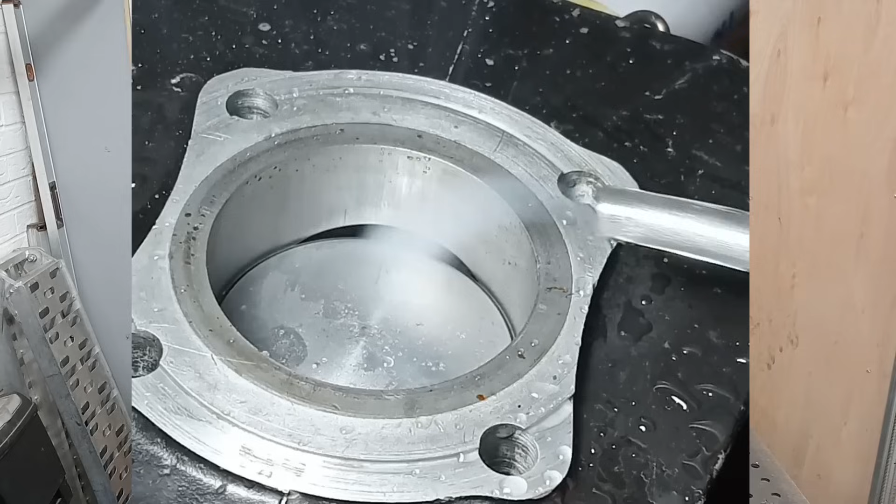I'm Dave, and today we're going to be trying to increase power by doing some flow testing on the exhaust duct of my Kawasaki AR93. We're going to do some modifications with modelling clay, and see if we can increase the flow, which we'll measure using the TalkSoft software.

Why am I doing this? Well, most of you are probably aware of a guy called Thiel. In his book, The Two-Stroke Master, which I've been reading, there's a bit worth noting: he asked for a flow meter to check the effectiveness of changes to the cylinder ports. Thiel used flow meters - mine's a slightly different setup, but it's measuring airflow. I believe it's something that could help us develop more power.

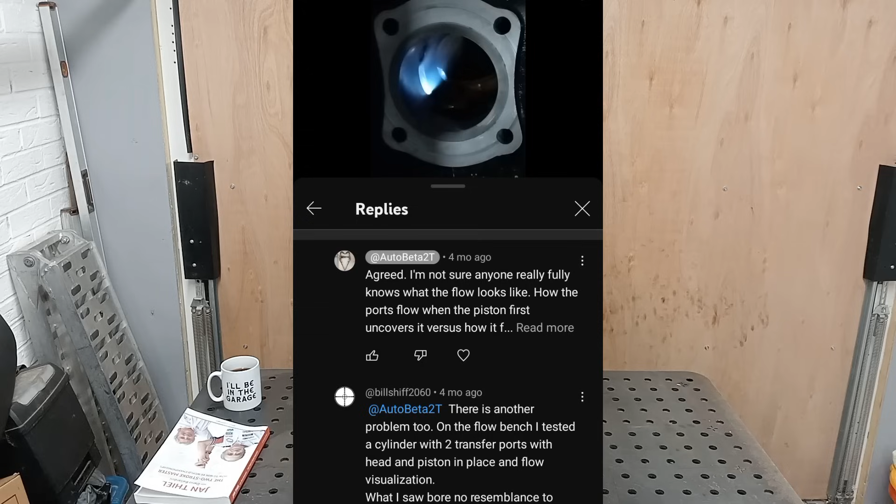Along with seeing that in Thiel's book, I've also had some conversations with a guy called Bill Shiff about some flow visualization I put up. That conversation sowed the seed, as well as looking for a way to flow test a two-stroke engine. Other resources too - there's a British guy who lives in America called David Vizard. He's got a lot of videos on his YouTube channel, particularly on flow testing.

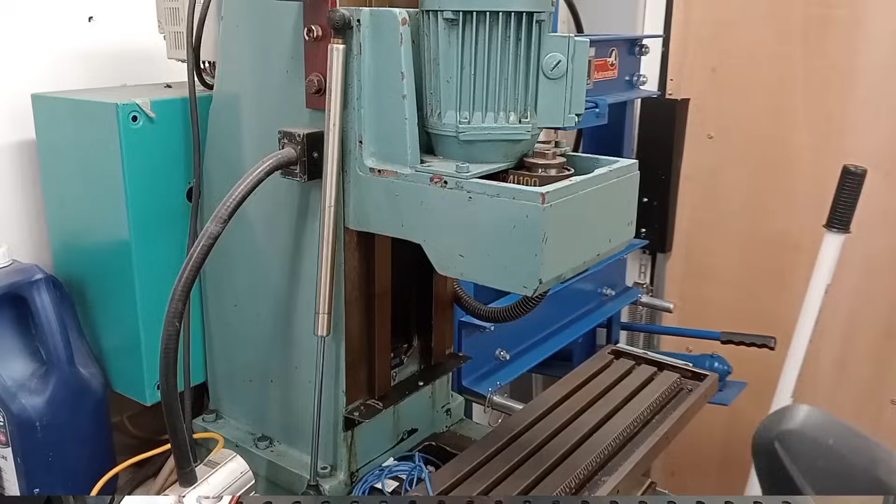I intend to do the exhaust today. Transfers will be a later video, and following on from that, I want to physically modify the cylinder so I can try some inserts, measure flow from 3D printed inserts, and then use my CNC machine, which I need to get going, to make a CNC insert for the exhaust duct that I've tested in 3D printed form, and see how that actually works on the dyno.

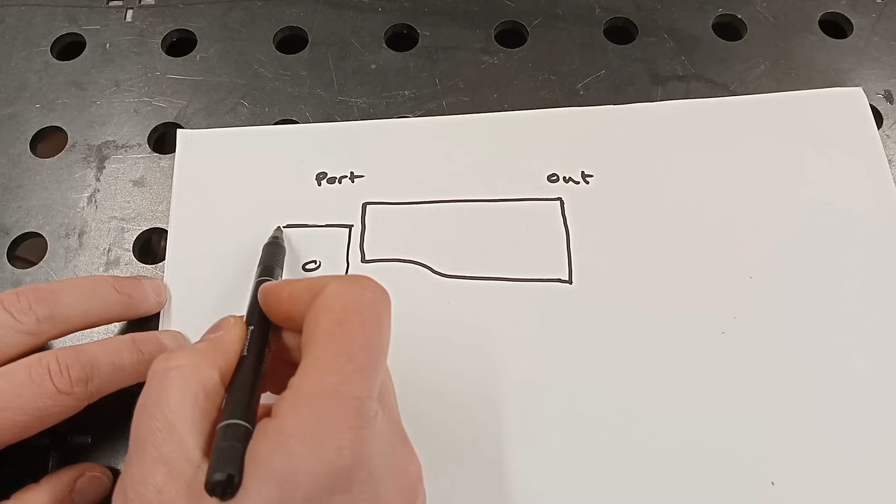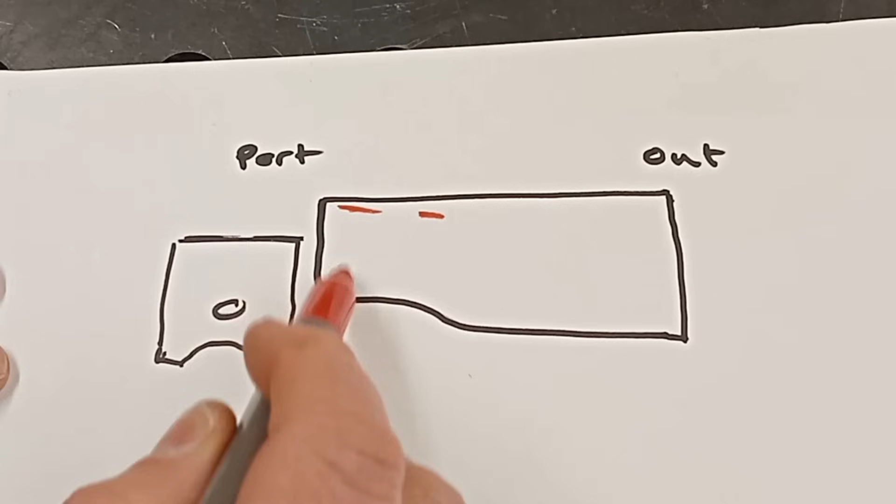Just wanted a quick look at the exhaust duct port. So you've obviously got a piston that can be all the way, closing the port totally, and at any position in between - I'll just notionally put a piston in there. As you can see, this duct has to cater for lots of different positions. It's got flow going into it initially through only a small area, and this flow's coming in and it's got a big void here, and then as it gets further down to the bottom, I imagine it's probably more uniform flow.

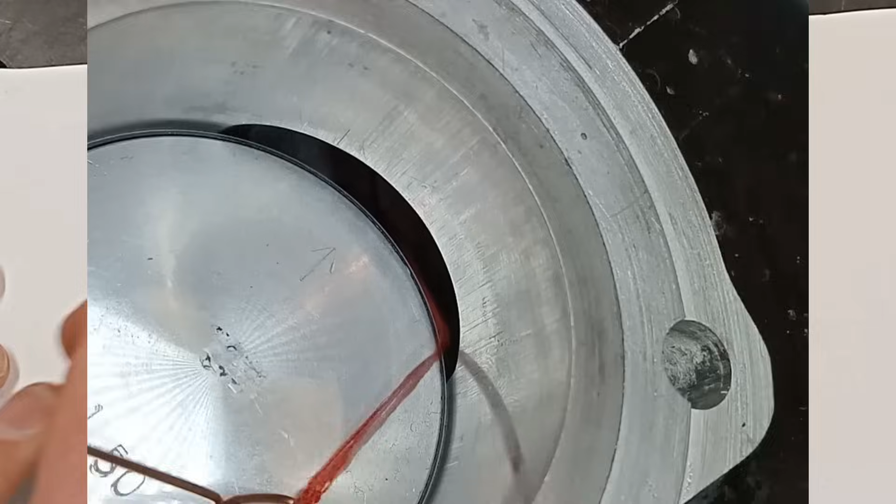For what I'm seeing at these not-fully-open positions, there seems to be quite a lot of slack flow there, and I'm getting a cotton thread attaching to the face of the piston. So really the blowdown is key - if we can optimize the flow at the blowdown to get the most amount of gas out, it should assist us.

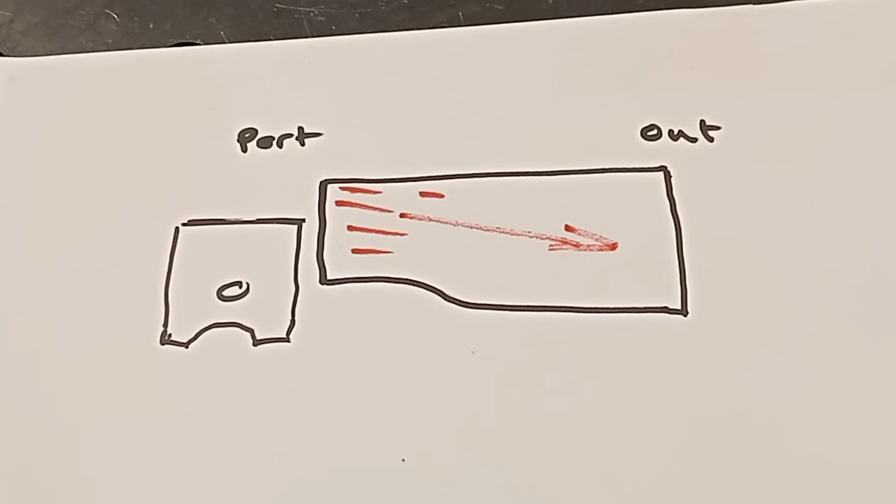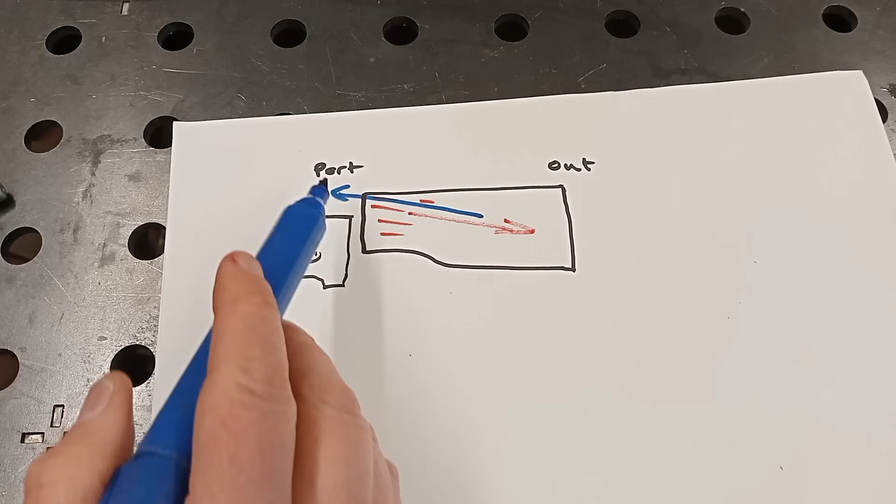Other issues as well - obviously we have all the exhaust gases going out of the duct, but also with a two-stroke, going back the other way, when the stuffing pulse comes in, we've got some fresh charge that we want to go back in. So I'm only doing flow testing going this way, but I've got to bear in mind there's also flow going back in when it gets reversed. So we're kind of optimizing it for flow out - how that's going to affect flow back in, I don't know.

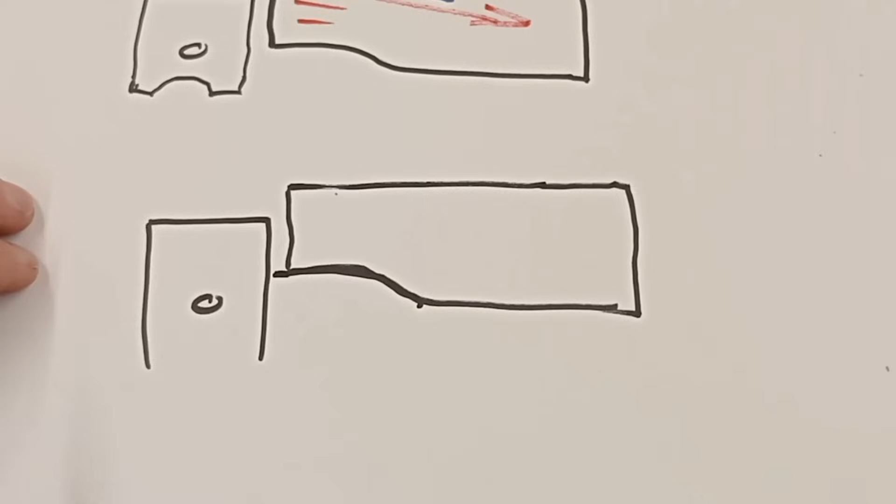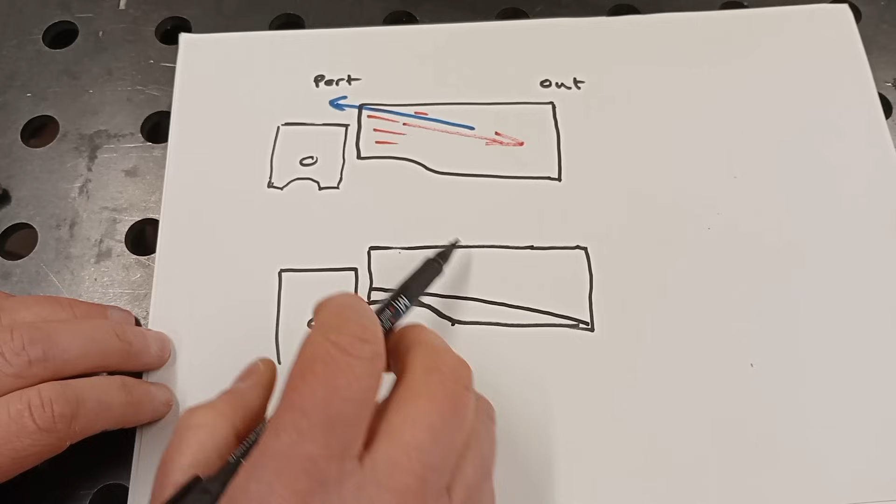So say we want to optimize this duct so it flows a little better - at the blowdown areas, I'd imagine - and there's a lot of talk about filling the port floor. At the minute this piston comes down to here, however there's not a lot of flow going on there. So there's potential for filling this floor, and smoothing it out. It's all about keeping the volume of this duct as small as possible so you don't dissipate energy into it, but also keeping the cross-sectional area.

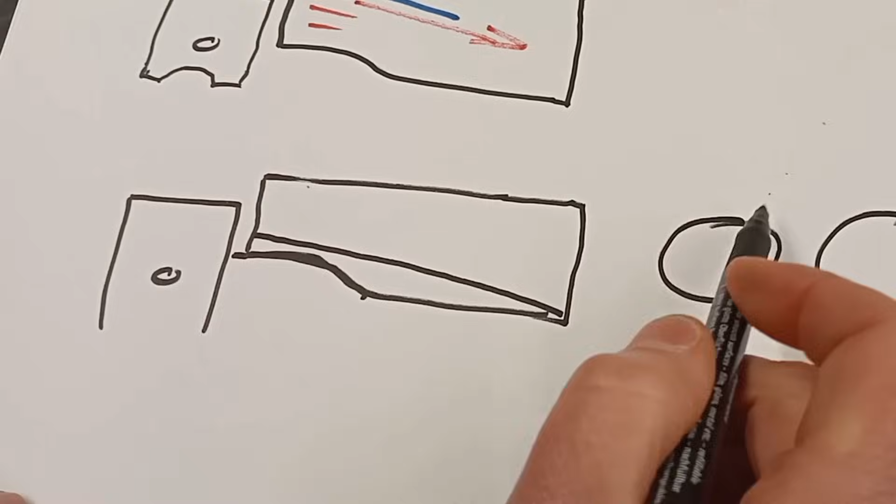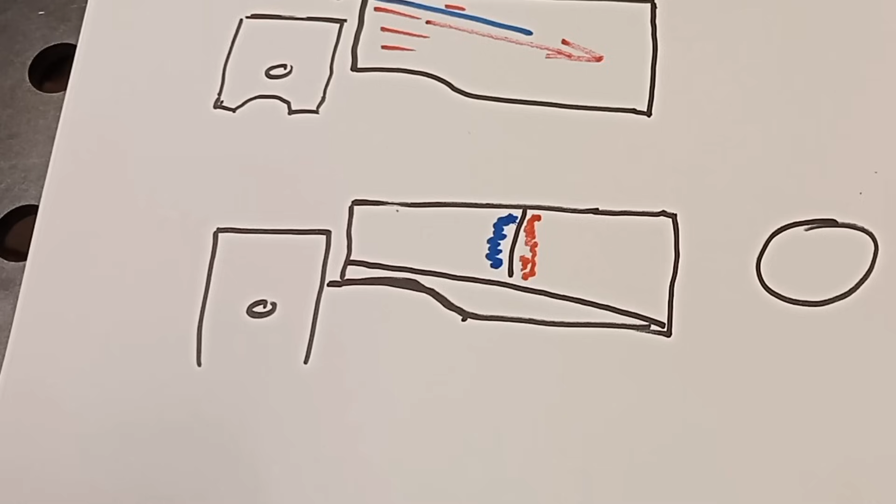If you look at it this way - comparing a small duct versus a big duct - if we put a section here, say you've got all the burnt gases on this side, and then you've got the fresh charge coming out like that, the bigger area you've got, the more this can mix.

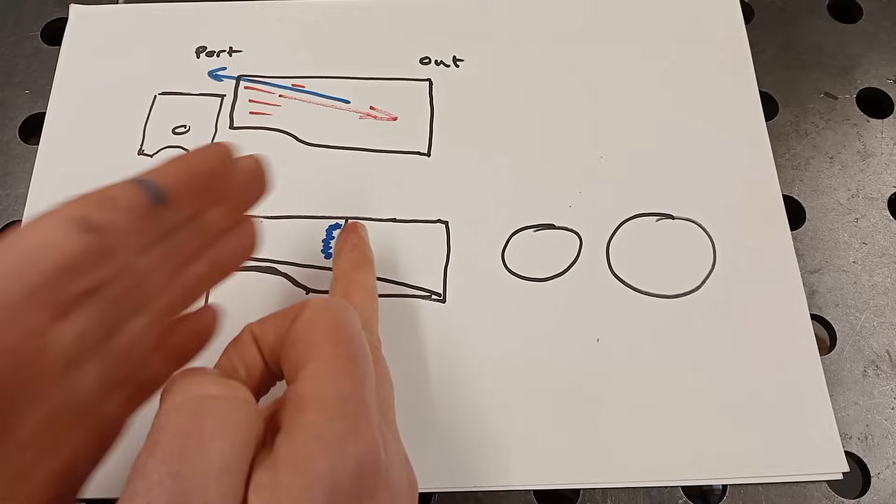And obviously in a perfect world it's not going to be like this, it's going to be chaotic. However, it's all about minimising this area so there's less interface between the burnt exhaust gases and the fresh charge, particularly when it goes back in, because if these are mixing heavily, you're going to get burnt gases back into the cylinder.

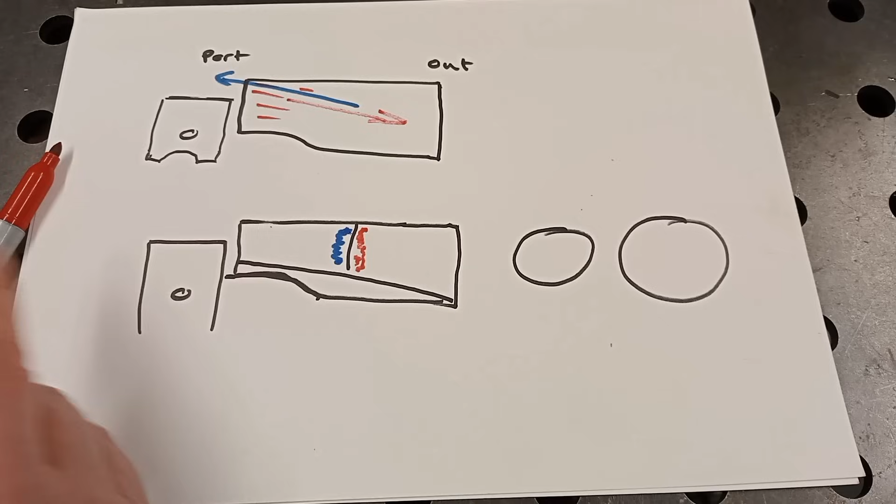So I definitely want to get the flow out, but there's also a certain element of how much fresh gas we get back in, where it's aimed, and probably the tumble and swirl that we put into it, which again helps with the combustion, speeds things up and makes more power on the next stroke.

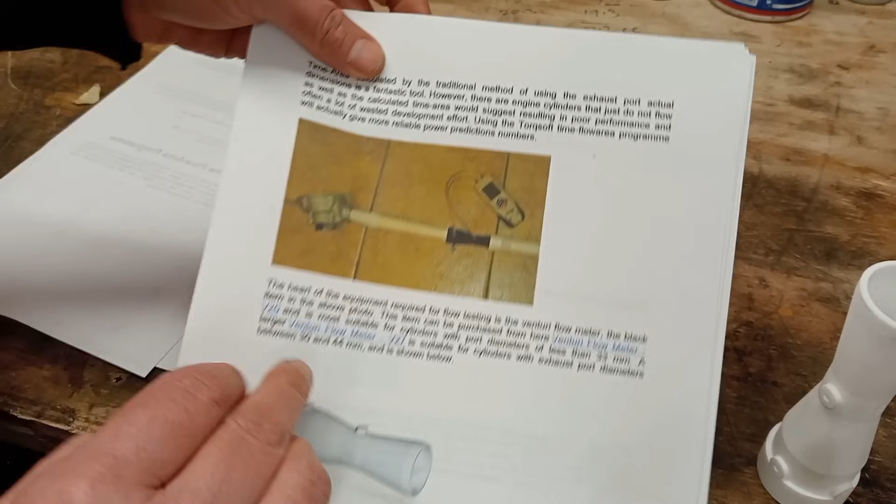I bought this flow venturi, so that gets connected to the pipe. You can just see it here. These are the instructions. So the pipe comes out, 300mm pipe into this venturi.

Got some brass nipples that I'm going to put in, and they sit in there in these 3 ports. I've got to ensure that I don't bottom them out on that hole either.

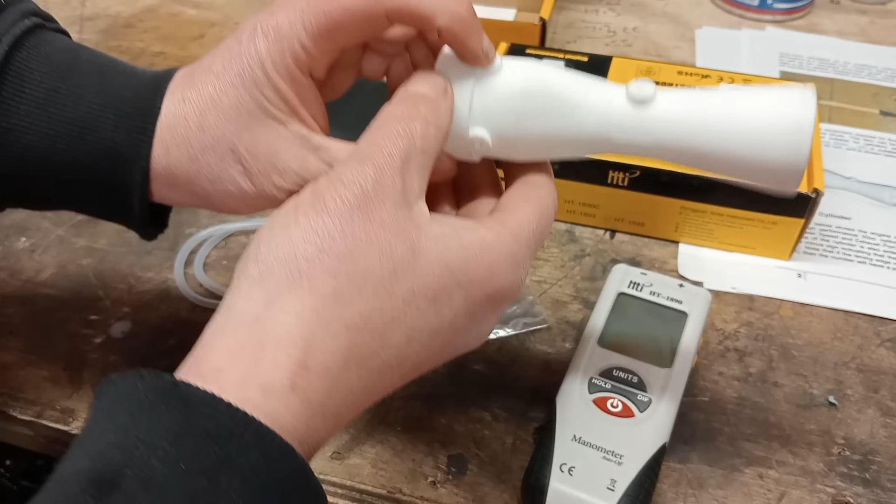I'm going to test the pressure with these manometers. You can see I've just got the same one. You're measuring the pressure, so you've got a reference pressure. I've got 2 of these, so one can sit there as reference pressure, and the other one's going to measure the delta.

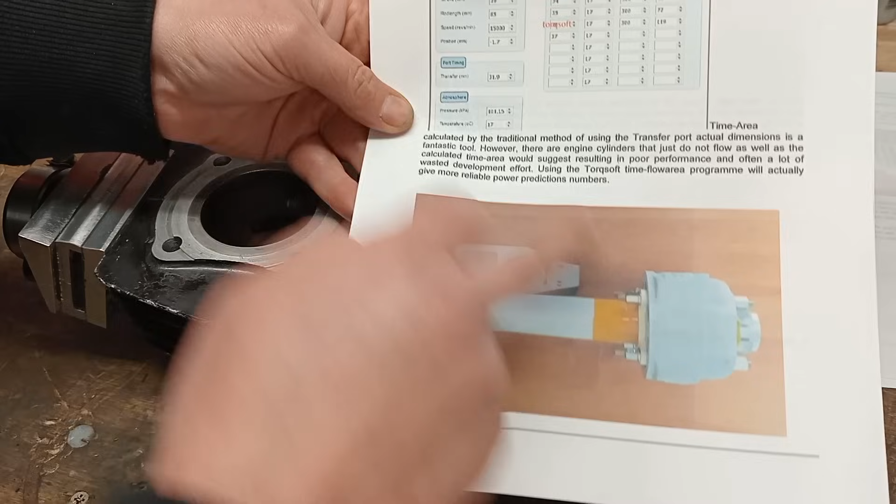So as well as exhaust ducts, it will do transfers as well. The piston's in there and it's moved at different points, and the pressure drops are obviously inputted into the program, and then it works out your time flow area.

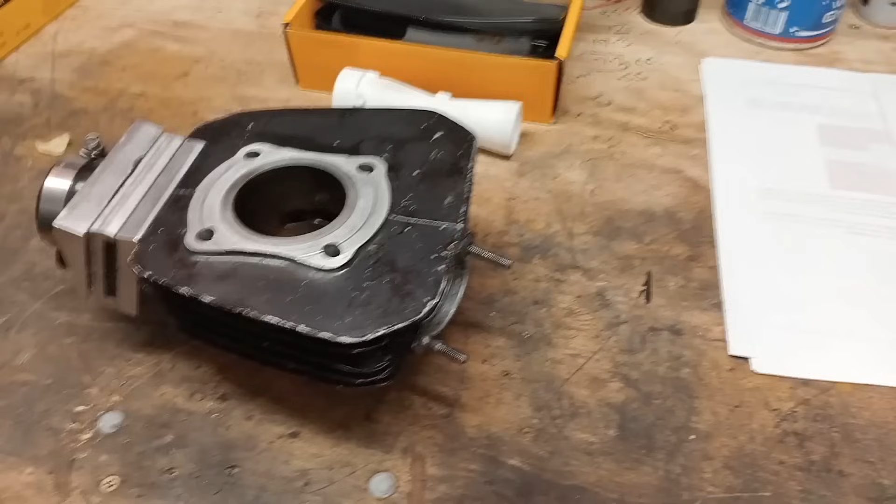I'm not too bothered about transfers at the minute. I want to test this exhaust port. Apparently you can put plasticine in there. I've got a few ideas of how I'm going to try different ducts. I'm interested in, can I get more power out of this just by altering this duct.

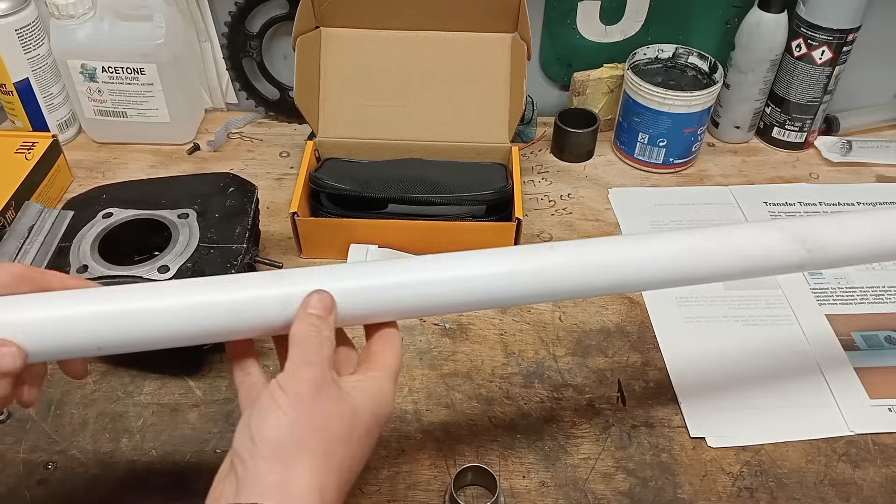This is 32mm internal diameter, and it's about 36. Now I'm lucky, it just fits, a really tight fit on my stub. I get it in square.

So that's going to go obviously in there, that'll be bolted in, that'll sit on there. That's the connection. The next end needs to go into here. I've got a bit of masking tape because it makes it a really good fit.

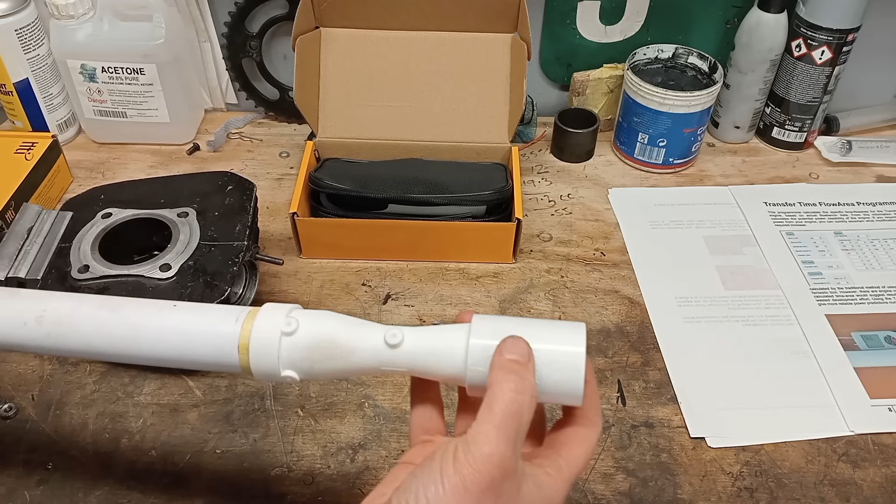On the other end, I then need to connect the other end of this pipe. So to do that, I've got one of these couplers, which I shall use, another bit of pipe in there, and then my hoover - this is the end of my hoover. I've got one of these, that fits really nice, it's quite a tight fit.

I can't get this tube into here, so I'm going to have to probably break this open. But I think it will fit in there, quite a snug fit. So that's the plan.

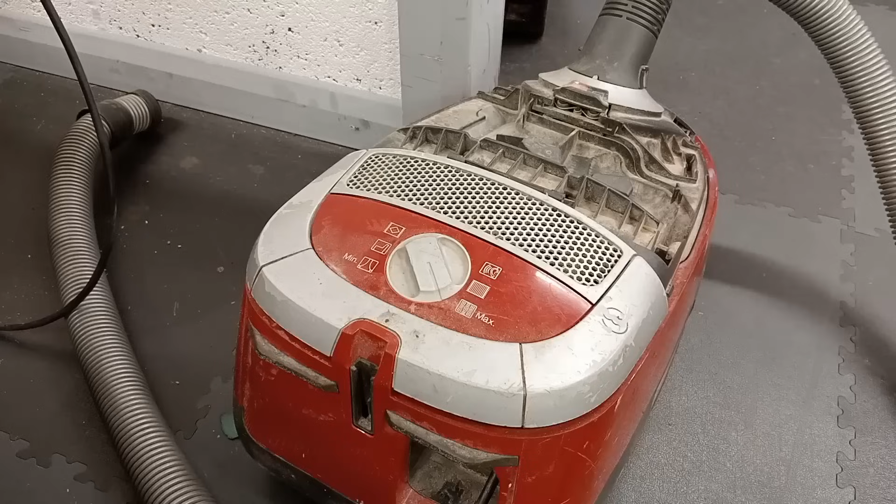This is my shop vac. It's a Miele, I don't know how you pronounce it. In the instructions, the guy, Anthony, was saying to put holes in a pipe and then use a sleeve to meter it.

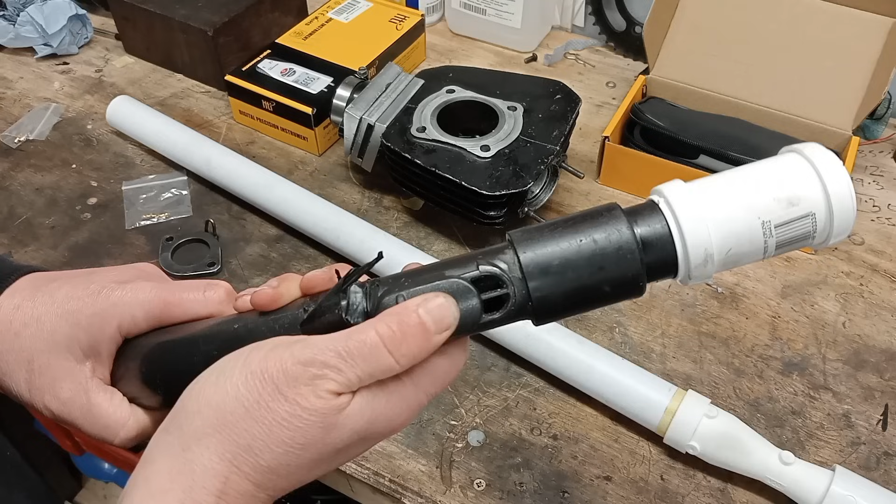I've got 6 power settings on this, so I can vary it. I think I should be able to vary it to get the pressure right. I can alter the bleed here as well, so I'm hoping I can control it to set the pressure right just with this and with the power settings.

If not, I do have the bigger bit of pipe, and I'll just have to drill some holes and make this slide over it to bleed the flow a bit more.

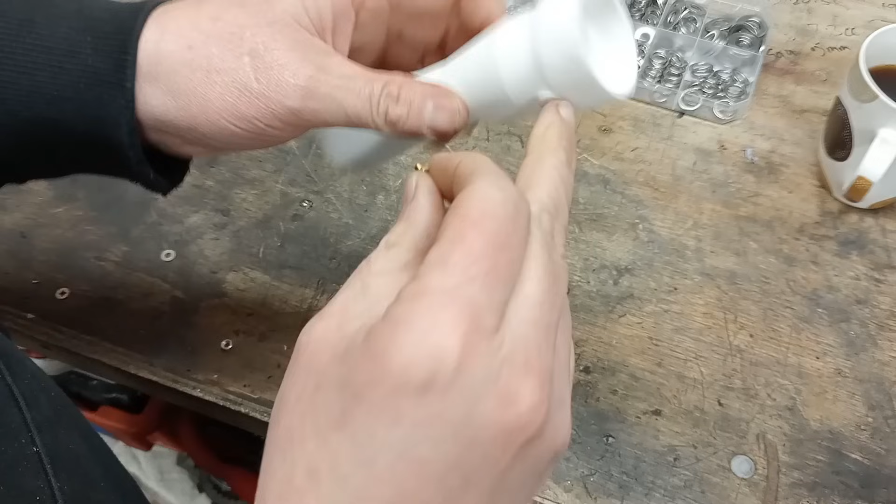I don't want that going in here and bulging out in there because it will affect the readings. So I'm going to put a little washer on here. I don't think it's going to hit it anyway because it's only going to come to there, and that hole's a bit further. But just to make sure, I'm going to put one of these washers on, and these should just self-tap anyway.

I have to get a little spanner on that now.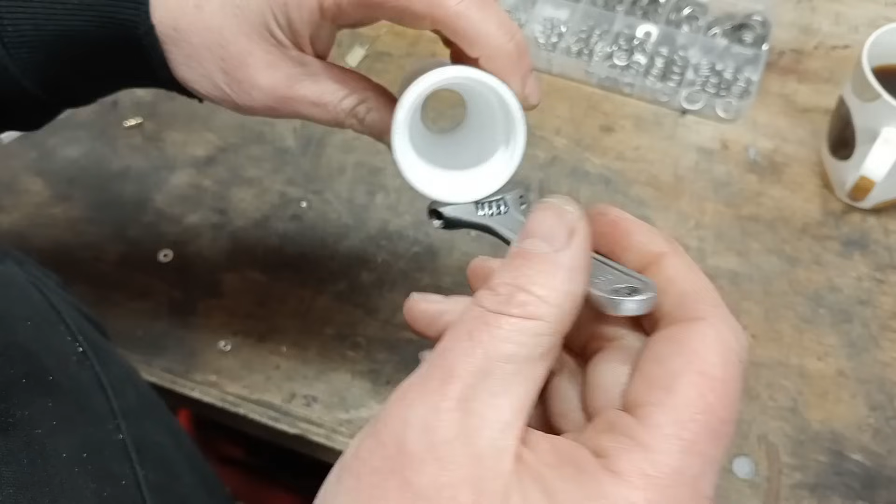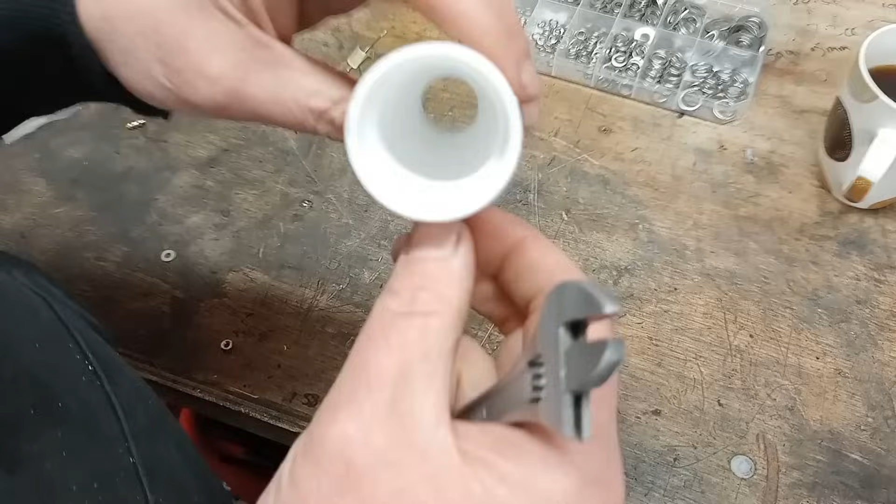Yep, that seems okay. The brass inserts are in and I haven't impacted down there. For the PVC pipe, I've been recommended a distance from where it connects to the exhaust port of 10 times the internal diameter. This is 32mm, so that's 320.

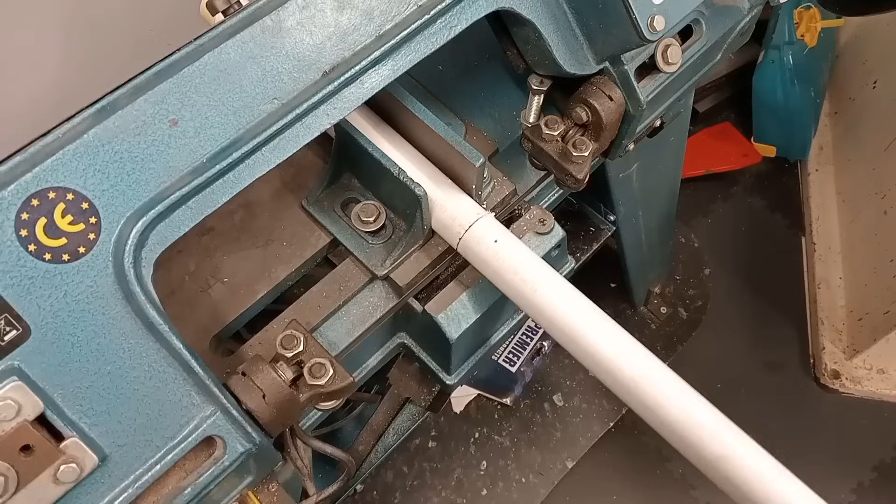Doing a 20. So this is the tube, and it's a real tight fit, so I've just got to connect that to this now.

See what that's like. I'd say one more. What's that like? Oh, that's nice. That's a good fit, like that. That's in. Good fit there. It just goes into the hoover.

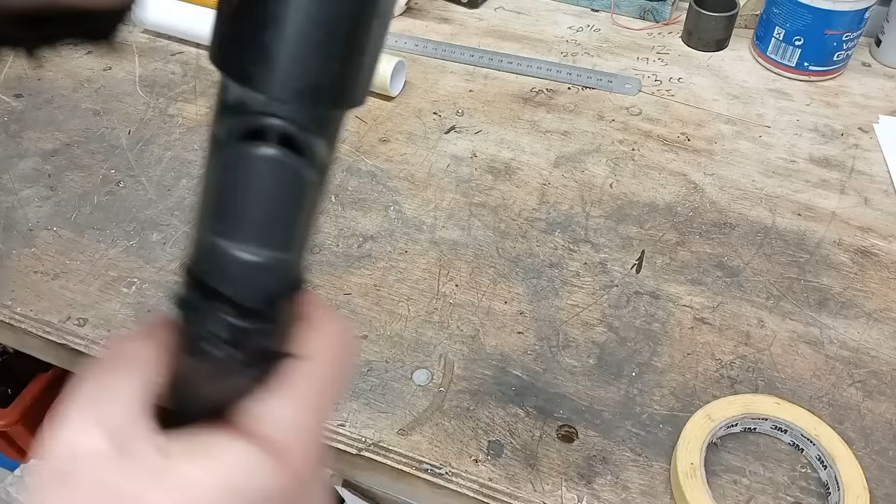Finally, I just need to bolt this on. I'm going to put a little bit of sealant on there as well, so I get a good seal on this face.

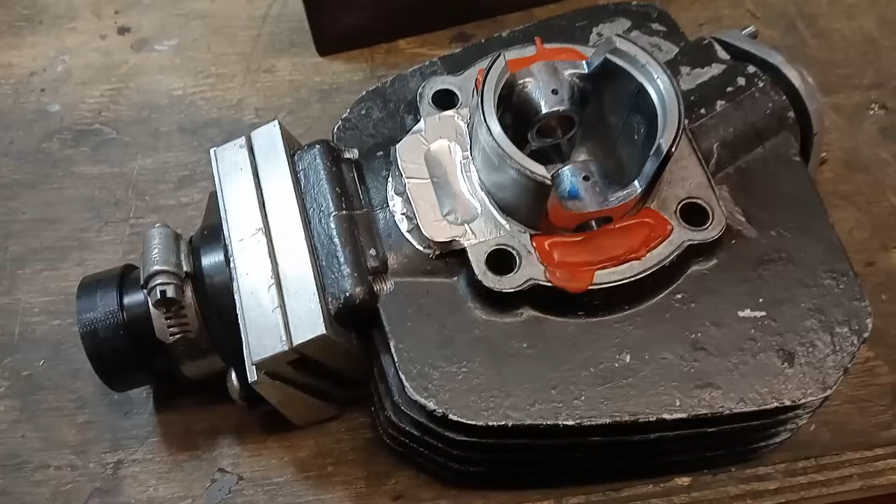To do the exhaust flow tests, you need to block up the transfer ports, so obviously there's no rogue air coming from there. I was going to tape it, but I just did some Vinamold - chop the top off, just push that in. I think that's going to plug it fairly well.

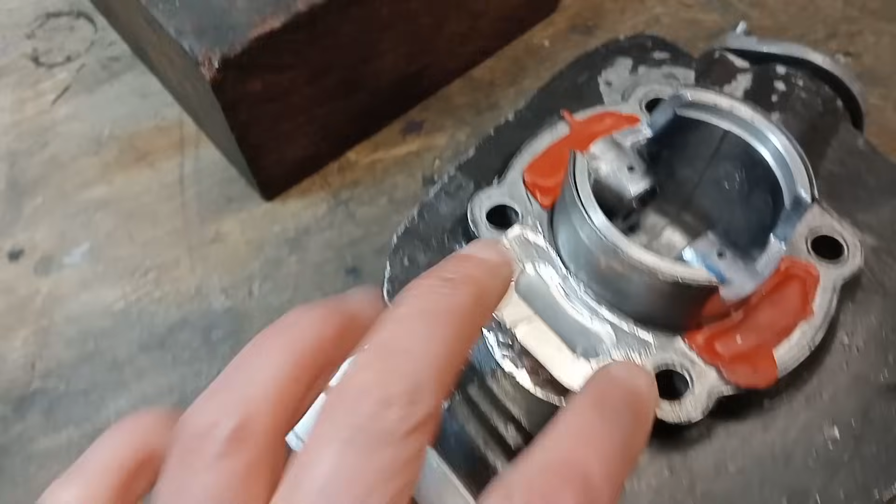Not a lot there going to get through there. Taped over that where it feeds into the crankcase, and I've just made a bung out of that black stuff to fit in there and block the intake.

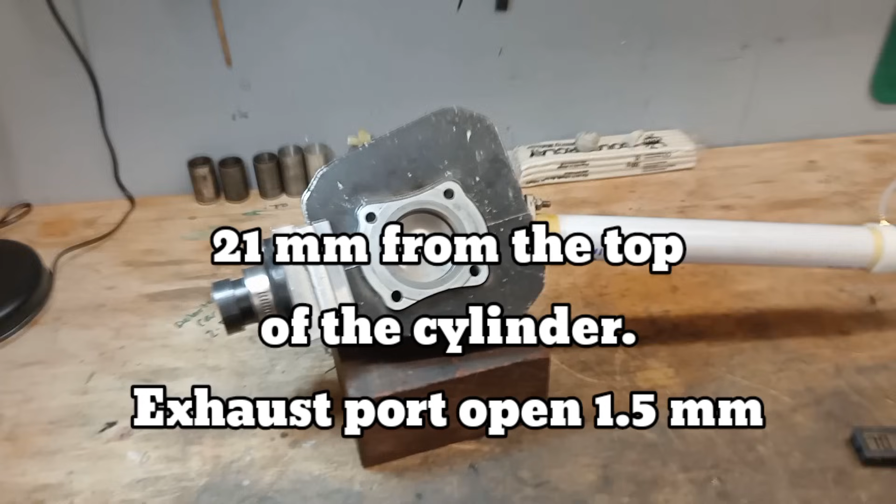For the testing, you start off with about 1.5 mil of the port uncovered. I've gone for between 1 mil and 1.5 mil - I've gone for 21 mil because that's what works. I've got, if I switch this on, this depth gauge.

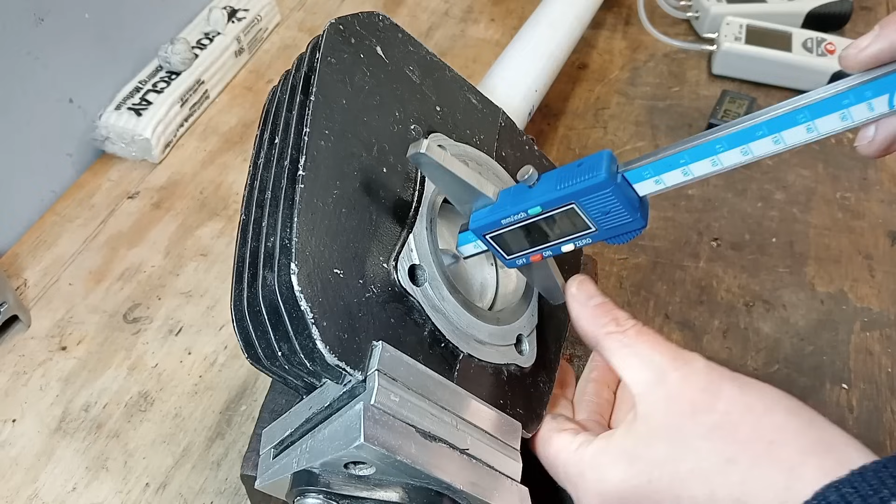Luckily it goes just below 0, and that's about the difference in distance from there to the top of the piston ring that's actually controlling the port, because of the Dykes ring. So when I set this to 21 mil, and then rest this on here, and push down keeping it square, and move like that - because obviously that's lower, so as long as I go over the high point, I know we're at 21 mil.

And then as I go, I take a reading every 2 mil. There we go, 23. I'll lock that off and then do it again.

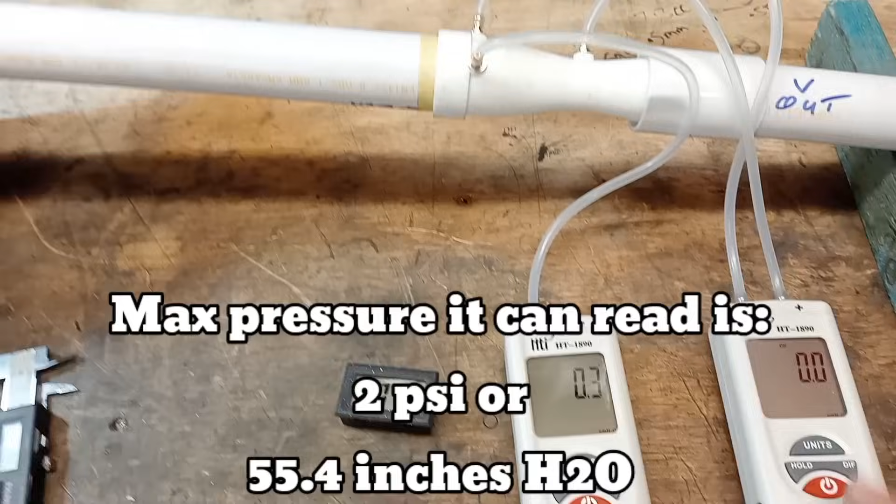Instrumentation - I've got these 2 manometers. This one is the pressure at the entry into the Venturi, which I guess is the reference pressure it's using, measured in inches of water. The second one is measuring differential pressure, so it's measuring the pressure at the Venturi throat and obviously at the inlet.

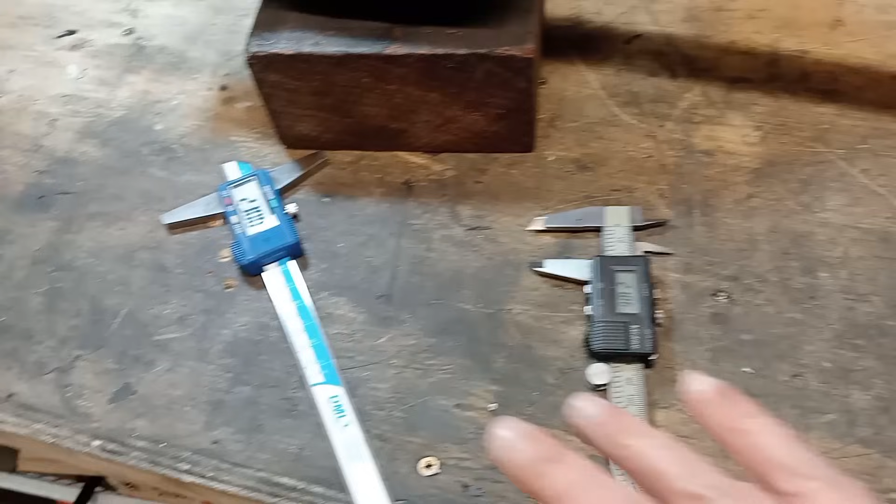I enter this into the program along with the temperature and also the piston position, and what it does is work out the flow time area, which is pretty much specific time area figures you'd use for port areas, but it's also factoring in the flow capability of the exhaust duct. Obviously in another episode, when I look at the transfers, it will factor that in too.

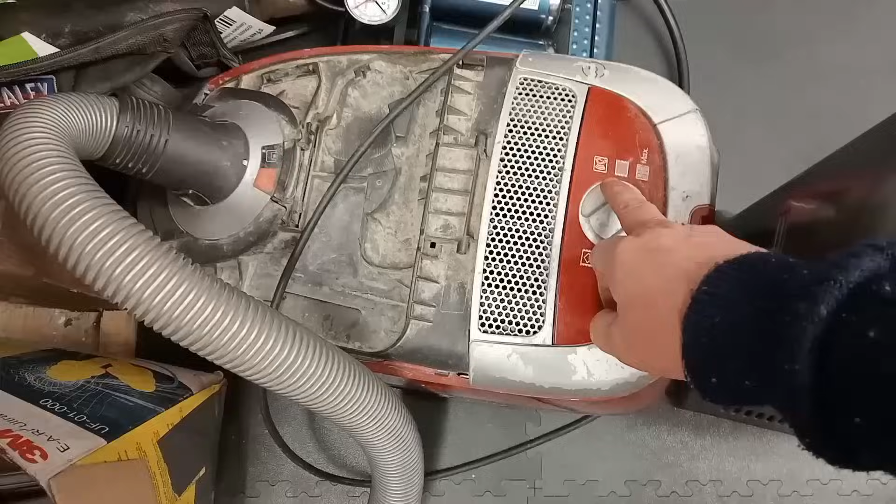It goes down to my hoover. The first time I do it, I have to have it on the lower setting, which is less vacuum, and I do have to exit some of the flow from there, otherwise I max out this gauge.

And then as I go, once I get down to about the 3rd reading, I've got it maxed out and I've got this done, and then the pressure here does drop because it can't sustain that high pressure - but the software figures all that out.

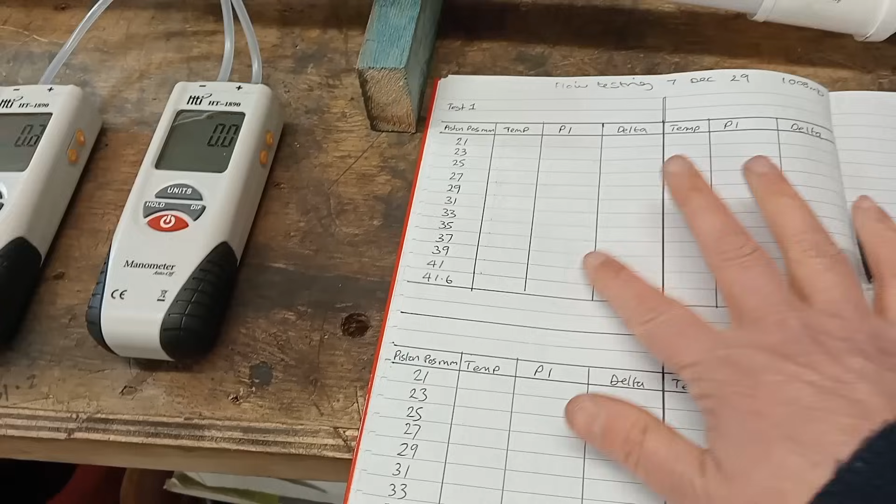First position, 21 mil, switched on, ready for data collection, test 1, and then I'll do subsequent tests. I've already done a load of testing just to try and get consistency, to see if I can, and I'm quite happy with the procedure I've got.

First test, we're down here because it's too much - because we've only got a very small gap. So you'll notice as I switch on the hoover, this will come up, and at 140 it will max out, so I'll be adjusting it with this.

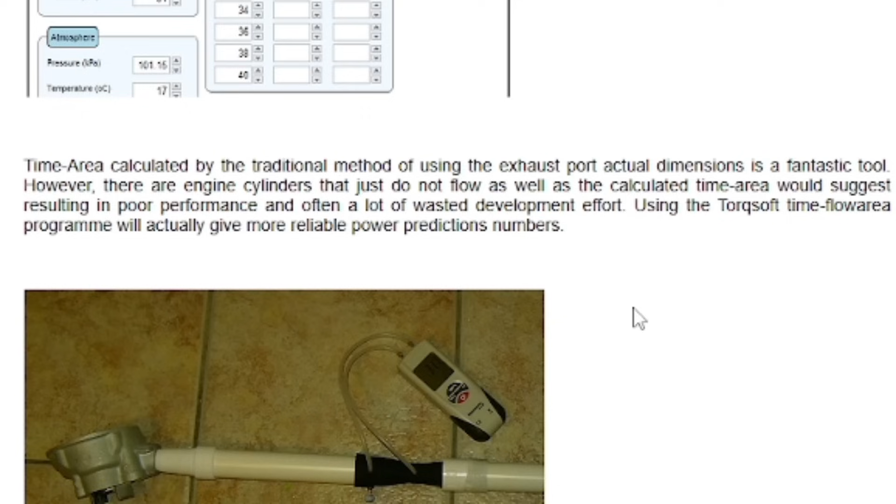Time areas calculate using the traditional method with actual exhaust port dimensions. It's fantastic tool, as it says, but however, if it doesn't flow as well as the time area calculated from the port area says, then your engine isn't going to perform as well. So by using this, you can actually see how much flow not only the port but the duct as well can handle.

That's the flow control Venturi, and you order that. It gets 3D printed and sent to you. It's about 80 euros, I believe. And then yeah, there's a few test cases that he's done, giving a more accurate power prediction.

So for me, I've put in all the data, engine dimensions, to speed up what I want done. That's your deck height. That's the diameter of the outlet, so it's 30mm at my stub. That's the distance to the port opening from the top of the cylinder. 19.5 I've used, that's to the ring just opening the port.

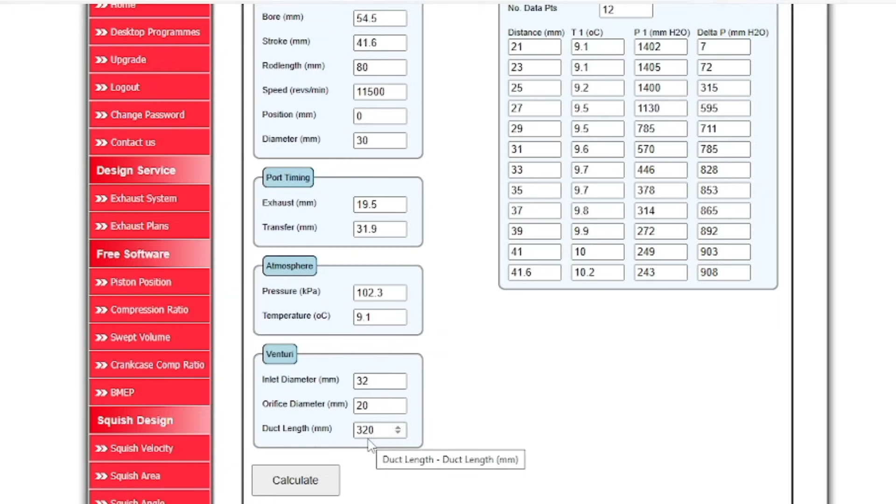31.9 is for the transfers. Pressure of the day, and these are the Venturi dimensions. So inlet 32mm internal diameter of the tube. The orifice itself is 20mm at the throat, and that's the length of the extension I put on.

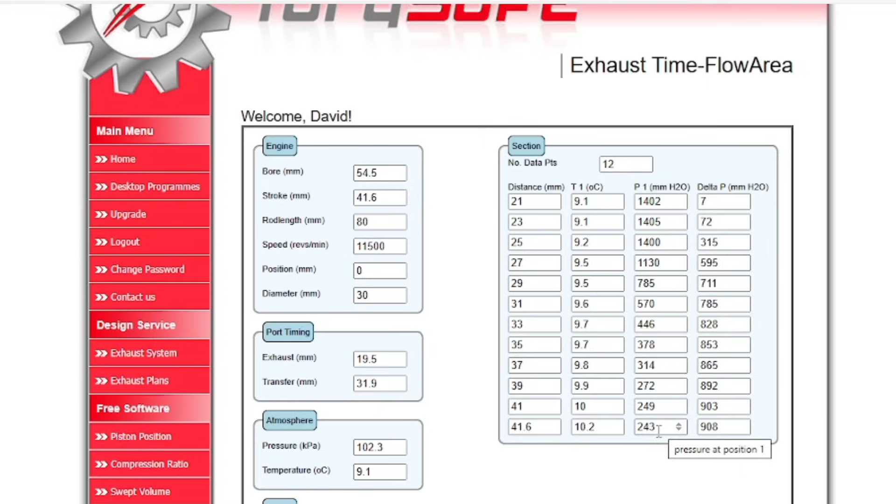So then you just go in and enter your data. First data collection point is at 21mm, which is 1.5mm open of the exhaust port, just for easy numbers for me. And then I did a step every 2mm. The temperature did vary a little bit throughout the tests. Starting off with the high pressure, that's about 2 psi, and obviously as it opened, the vacuum couldn't sustain the high pressure. However, this is the beauty of this program, it just calculates it for you.

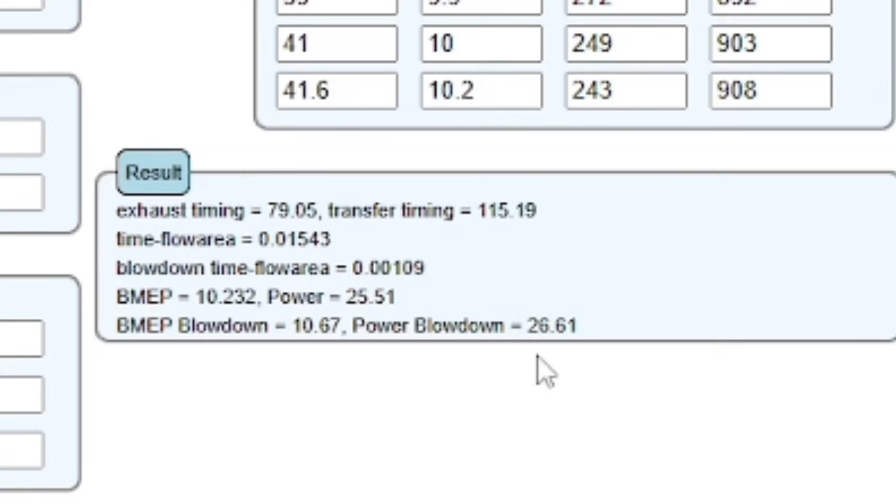So you put your data in, hit calculate, and that gives you - this is the standard exhaust that we're going to look at in a bit, the standard exhaust port. It said it should give 25.5 horsepower for the exhaust area, or 26.6 actual blowdown. But importantly that is at the crank, so probably 15 to 20% losses. If you call it 20%, you're at 21. So in theory, something else in my engine's holding me back. It might not be the exhaust duct, it could be the transfers.

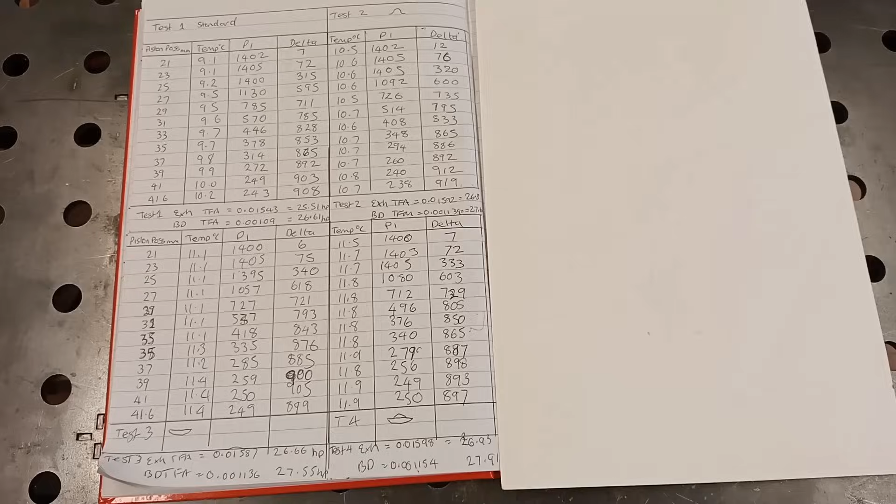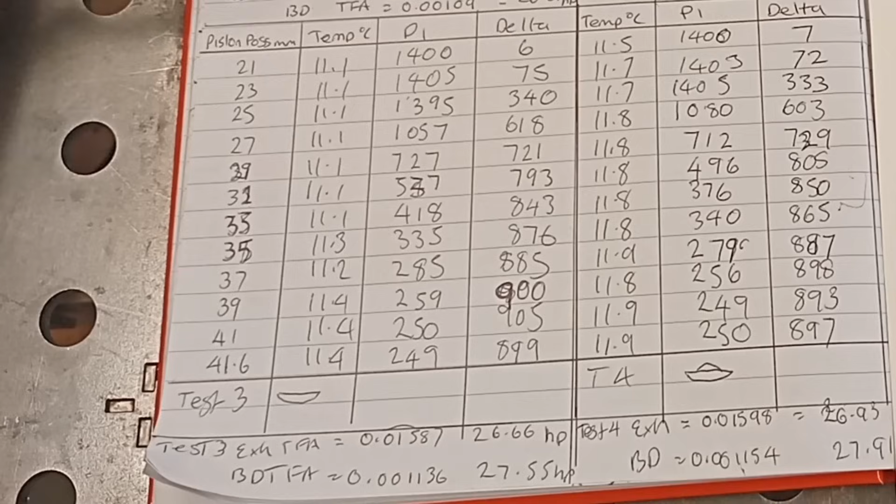Okay, just going to talk through the results. So I did 4 tests. Test 1 was standard. Test 2, I put like a little lump in the middle. Test 3, I actually filled that in and made it flatter. And then test 4, I put another lump on top of the flatness. So what results did we get?

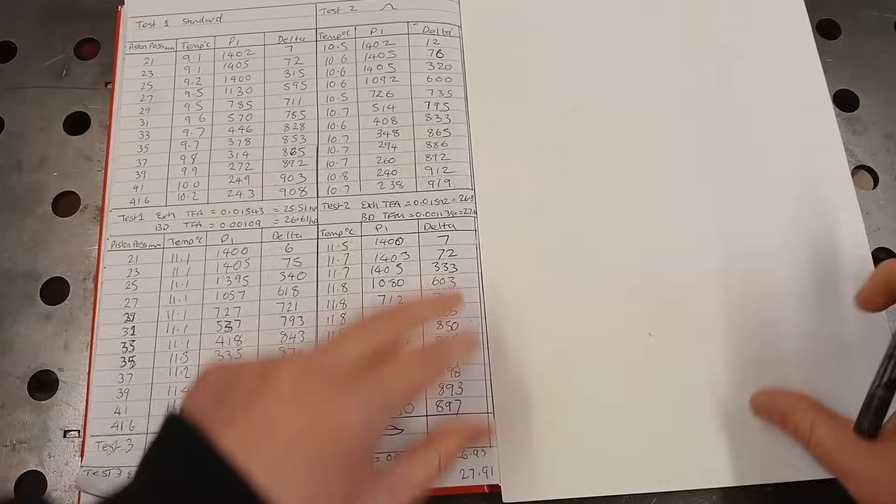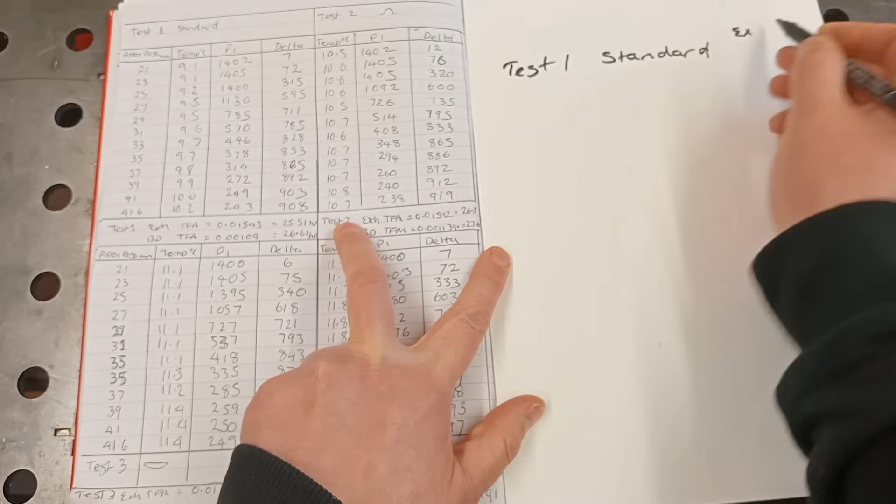So I was going to write them out. Test 1, that was standard. And the exhaust power output for the exhaust was 25.5, and blowdown 26.6. Then test 2,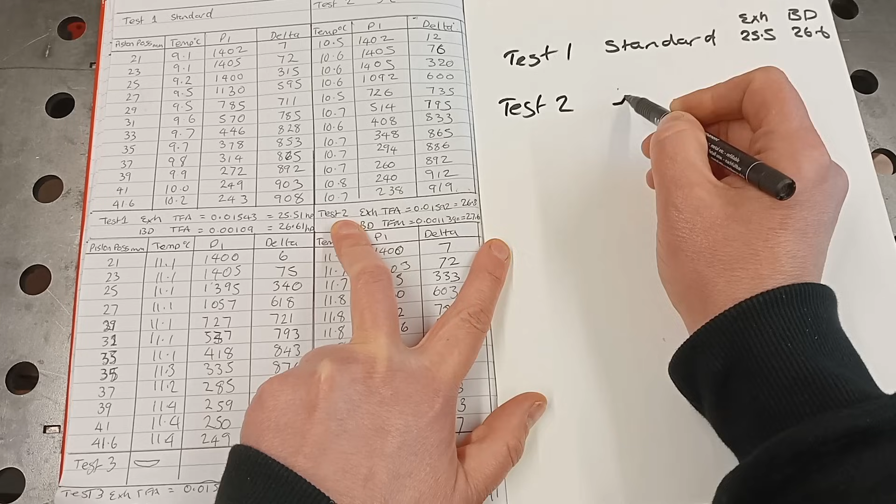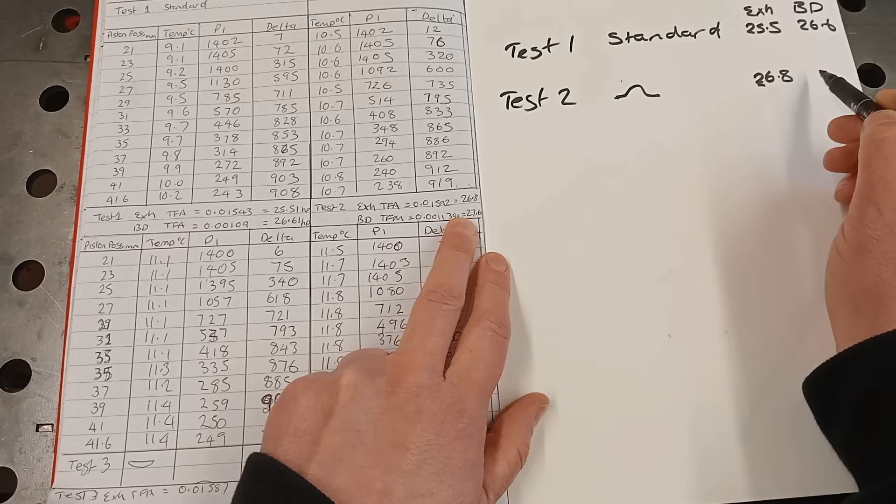on the bottom of the exhaust duct I made like a little vane in the middle, and that gave me 26.8 horsepower for the exhaust and 27.6 for the blowdown. So quite an improvement just from putting that little vane in there.

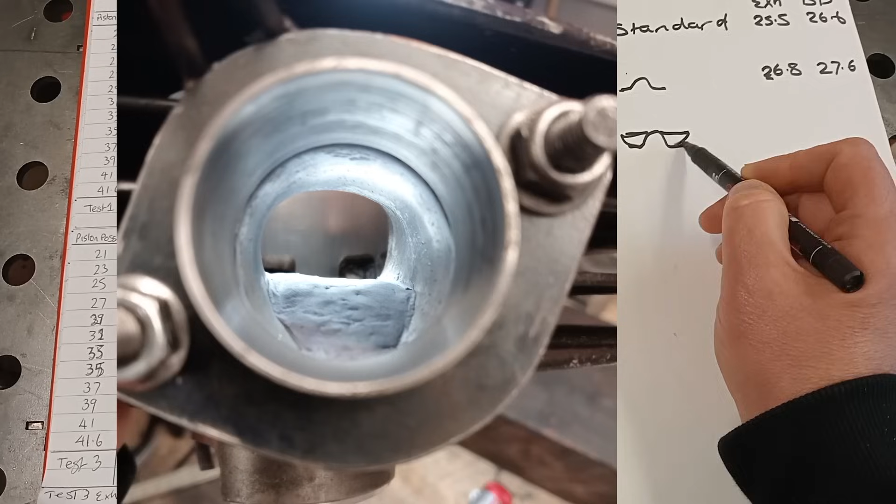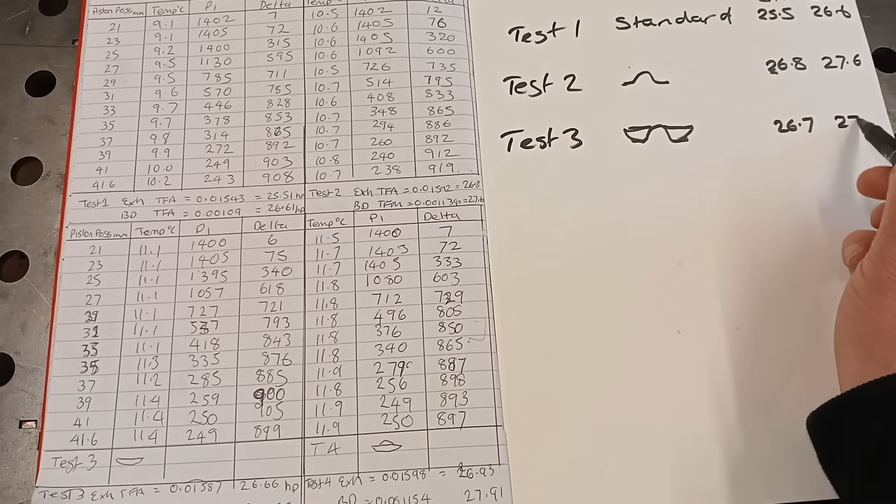Third test, I then filled it in, so test 3, I took this bit and filled it in, so it's almost like a flat bottom. That didn't actually make much difference - it actually dropped a little bit on the exhaust power and was about the same on the blowdown. I did do a previous test of this and got a slightly better result, so I don't know if it's just the way I put the modelling clay in. However, it seems to like this little bit of a division in the middle, that rise.

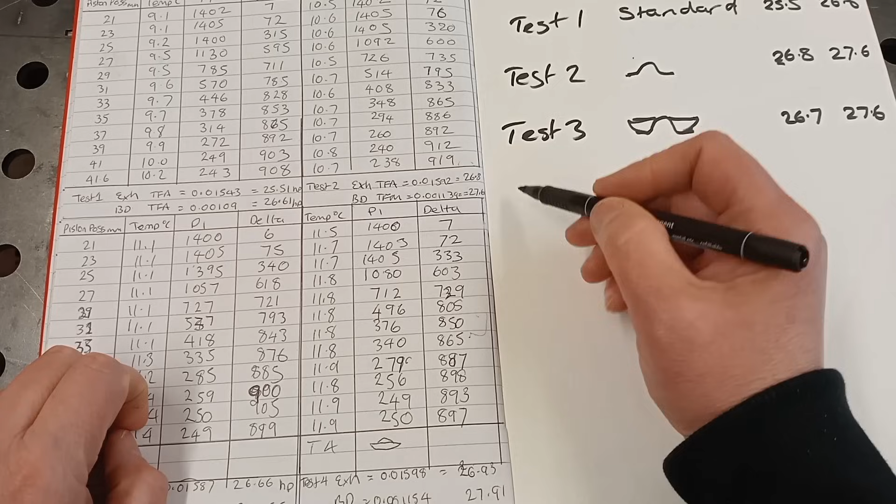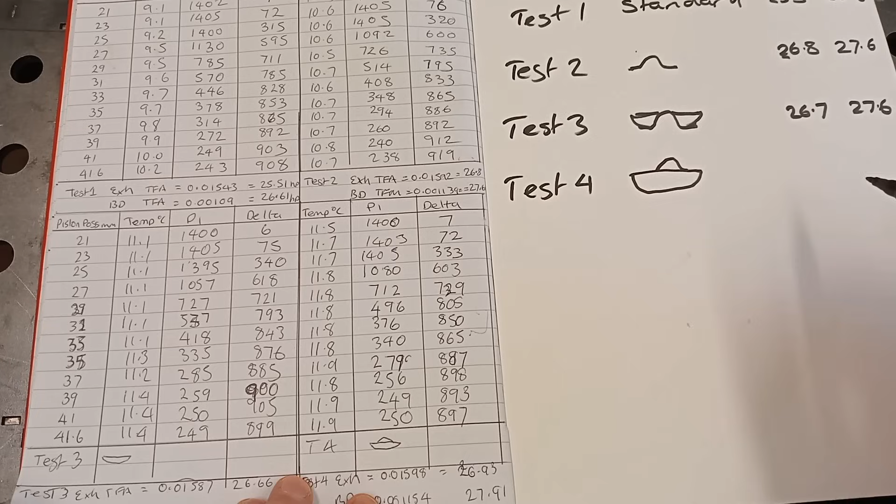So for test 4 I tried a bit more of that - basically what I'd got, and then I put another lump on there like that, and that did get me an increase again. So we went to 26.9 for the exhaust and 27.9 for the blowdown in terms of power.

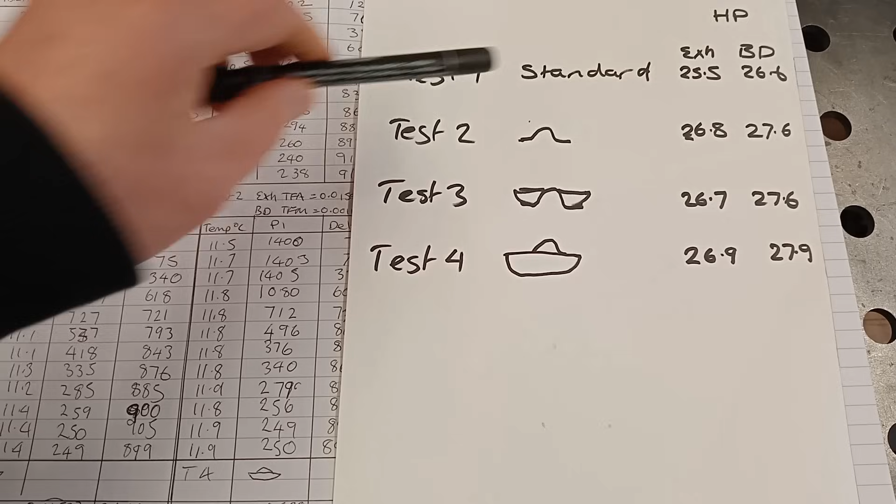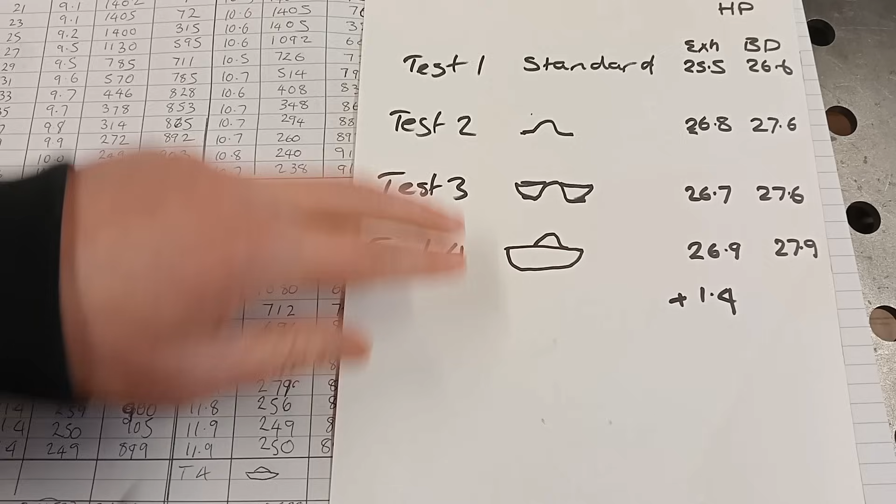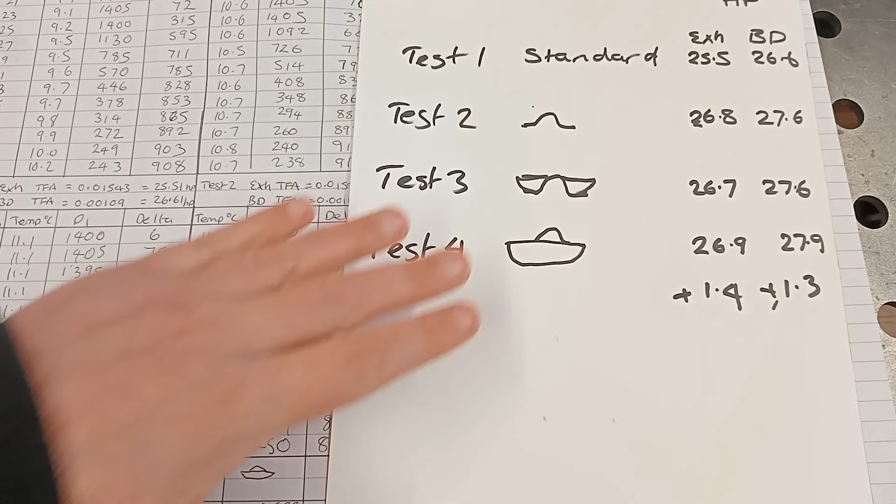So as you can see, from standard, exhaust potential has gone up by 1.4, and for blowdown again that's 1.3, which says to me we should be able to get a little bit more power if I optimise the exhaust duct. That said, this is saying I can get quite good power from the exhaust. I may need to look for restrictions elsewhere, which is when we're going to come on to look at the transfer flow after that.